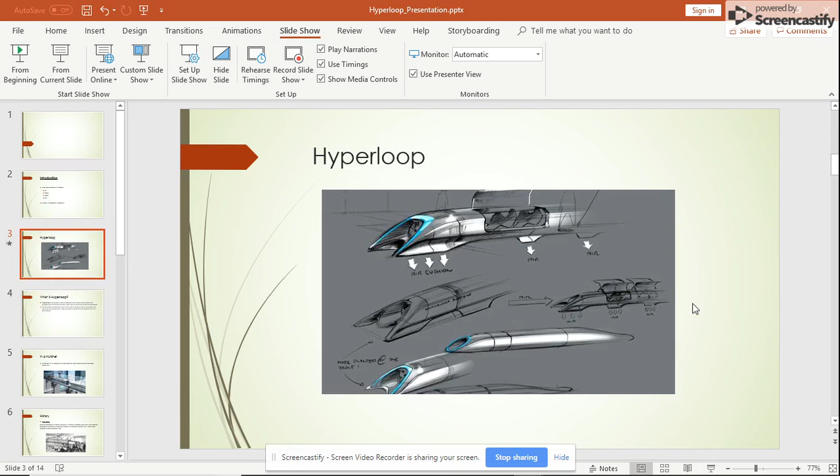This is one of the earliest schematics of the Hyperloop, designed by Elon Musk. So what is a Hyperloop? Let's answer the basic fundamental question. This idea is not a very new one, in the sense that from the 18th century onward, humans have been using pneumatic tubes, or proposed ideas about vacuum tubes. But this is new in the sense that it doesn't just use those ideas, it builds on them. Let's look at how this works.

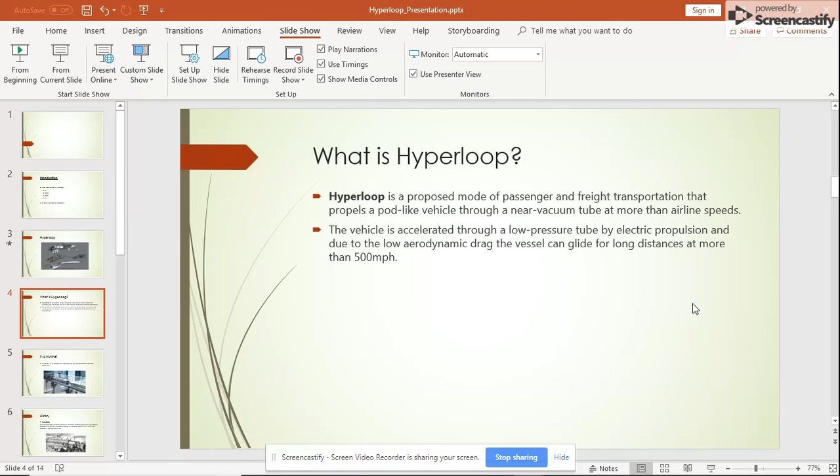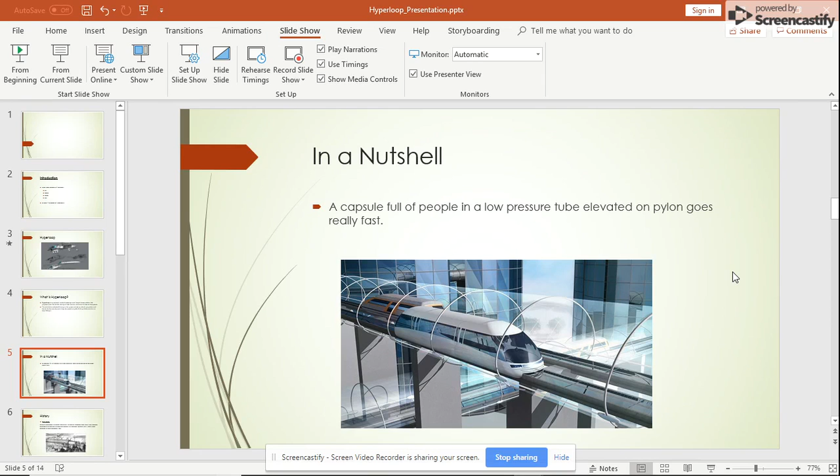This mode of transport is proposed for both passenger and freight transportation. Instead of using a vacuum tube, it's actually near vacuum, low pressure tubes, which propel passenger or freight pods at more than airline speeds, theoretically close to 500 miles per hour. To summarize, a Hyperloop is basically just a capsule full of people in a low pressure tube which goes really fast. To understand this completely, we have to go back in time and look at the history of how these capsules were developed theoretically.

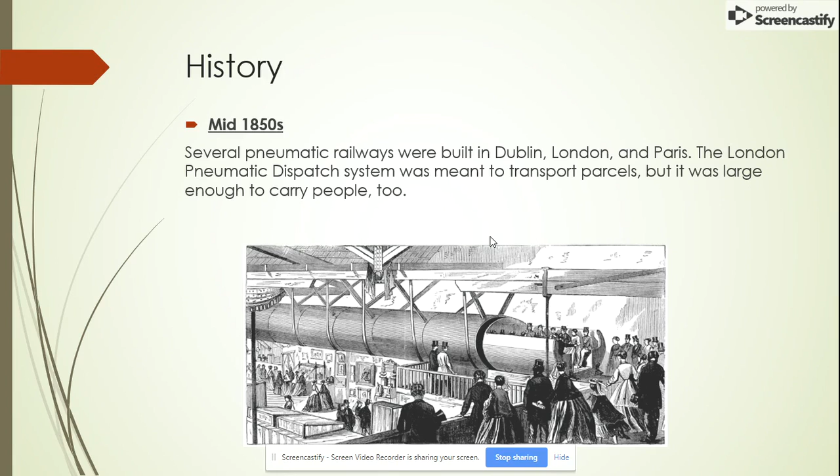Let's go back in history, to the mid 1850s. This was one of the very first times a pneumatic railway system was built, in several countries, in places like Dublin, London, and Paris, and they were meant to transport parcels first. But since the technology back then was not very efficient, the containers were actually large enough to carry people too.

Now let's move on to the 19th century. There were several versions of pneumatic tubes from the mid 1850s to the 19th century. But let's look at one of the major commercial uses they were built for. By the end of the 19th century, once people mastered building pneumatic tubes, they built large scale pneumatic tubes for commercial applications, for transporting mail and other messages.

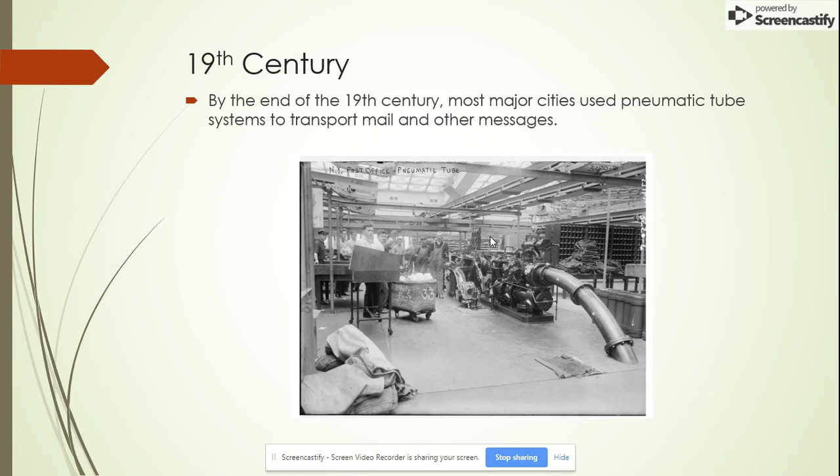I've used the word pneumatic tube a lot by now, so let me explain what it is. A pneumatic tube is a container very close to vacuum, which uses compressed air to move solid packages from place to place. It differs from a regular tube in that a regular tube is usually used to transport liquids, while pneumatic tubes were used to transport solid packages like mail.

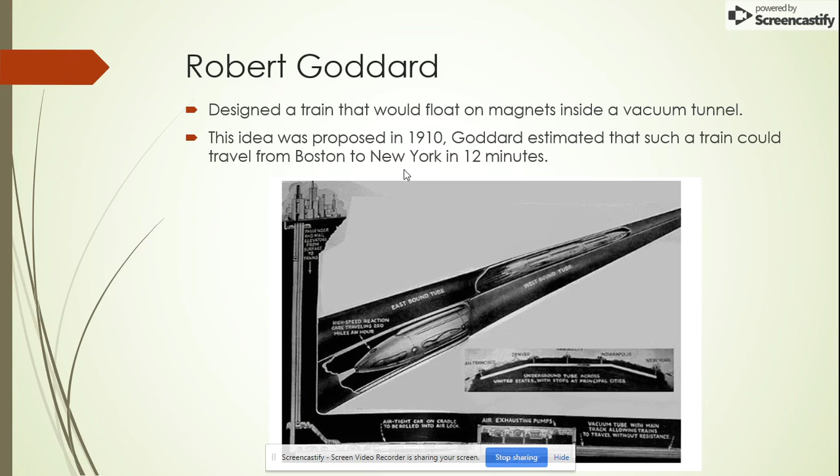In the 20th century, one of the very first models of using a tunnel or tube for large scale transportation was theoretically proposed by NASA pioneer Robert Goddard. His idea was to create vacuum tubes. He wrote a paper on this in 1910, estimating that if we were able to build a vacuum tube from Boston to New York, we would be able to transport people in about 12 minutes, according to his theory.

Moving on to the early 2000s, the next major proposal came from ET3, a commercial company, which designed a small scale pneumatic and maglev train, also built on similar principles to the pneumatic tubes we discussed earlier.

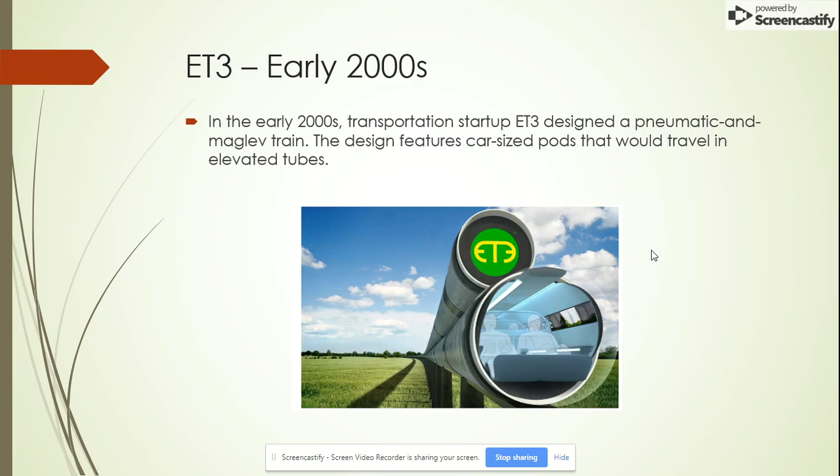So as you can see in the picture, the design features car-sized pods that would travel in elevated tubes. It would not be on the ground; it would be at a much higher, elevated level than the ground.

Okay, now moving on to the present. By that I mean early 2012, 2013, when Elon Musk wrote his first white paper on hyperloops. So essentially, now we understand the history of how humans have been able to evolve this technology, be it using compressed air for transporting mails, and then trying to prove that vacuum tubes would be a better alternative for transporting people from place to place.

So Elon Musk suggested this idea - he was actually inspired by all these ideas, using low pressure tubes to attain very high airline speeds, theoretically close to 500 miles per hour. That is because since we are using low pressure containers, there would be very little aerodynamic drag, which will allow us to attain such high speeds.

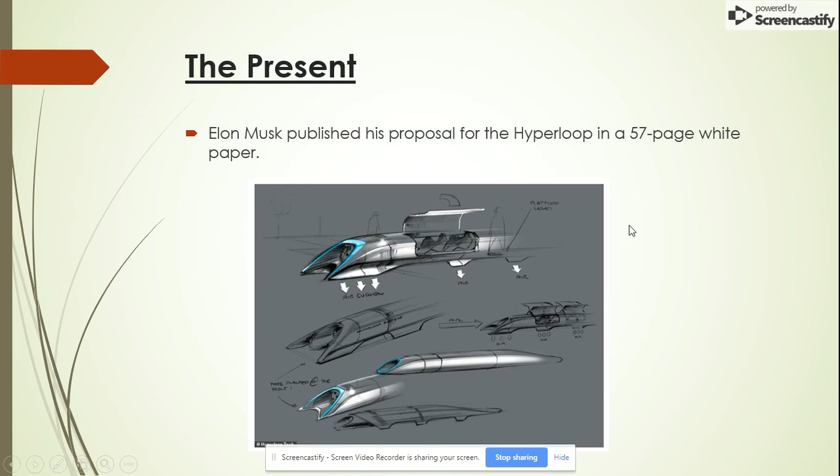Okay, now let's look at the motivation behind developing this project. In about 2012, 2013, the Californian government accepted a proposal for a high-speed rail system between Los Angeles and San Francisco with about a 68.4 billion dollar budget.

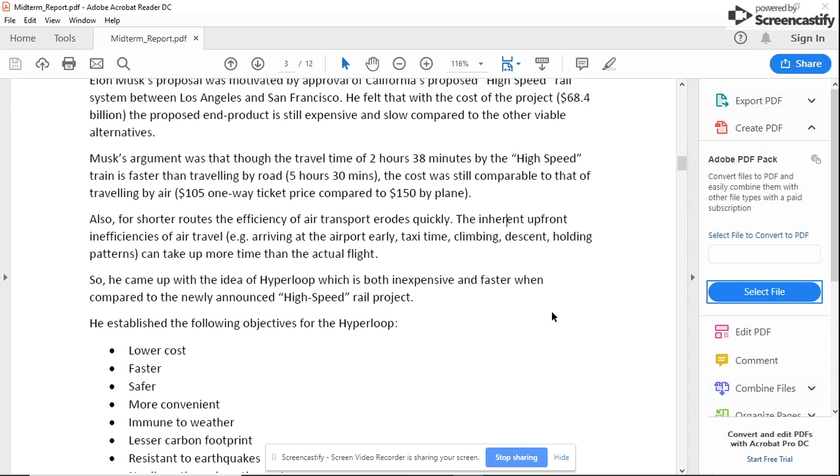After this was accepted, Elon Musk argued that with a travel time of about 2 hours 38 minutes by high-speed rail, although it appears faster than road transport, which is about 5 hours 30 minutes, the cost was still comparable to that of traveling by air - you're paying around $105 as compared to 150 by plane.

So he argued that with about similar or a much lesser cost, we could develop a much higher speed transportation system using low pressure air containers, which reduces the aerodynamic drag, and also which won't be a hindrance to the existing highway system, because you could build this hyperloop on a much elevated level.

So he established the following objectives for hyperloop: lower cost, it has to be faster, it should be safer, more convenient, immune to weather - especially earthquakes - and lesser carbon footprint, and no disruptions along the route.

That is explained by the fact that you won't disrupt - so to build a rail, you're going to disrupt the ecosystem, and you're going to disturb the land in which you'll lay the railroad, you'll develop the railway system.

Whereas for Hyperloop, you're just going to use pylon levels and build these tubes on top of them, and they're at a much higher elevated level, so it doesn't disrupt anything.

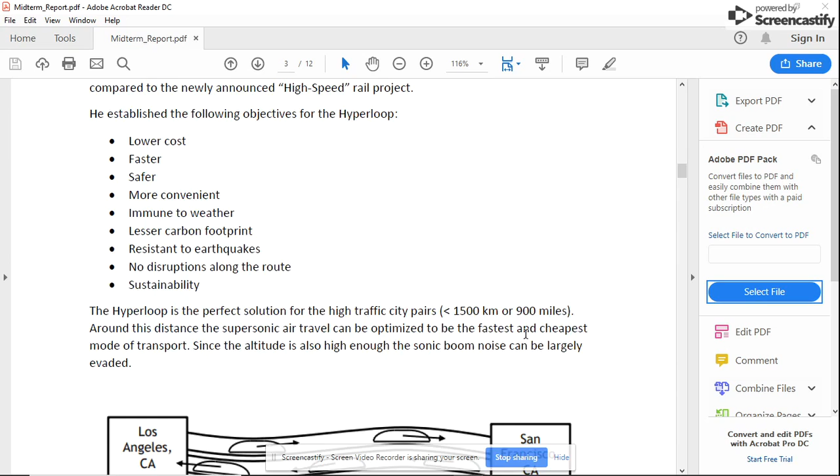And also sustainability - Elon Musk also suggested in his first proposal that since there are solar panels built on top of these tubes, the whole Hyperloop can be self-sustainable. This is one of the schematics between San Francisco and Los Angeles, the first one developed.

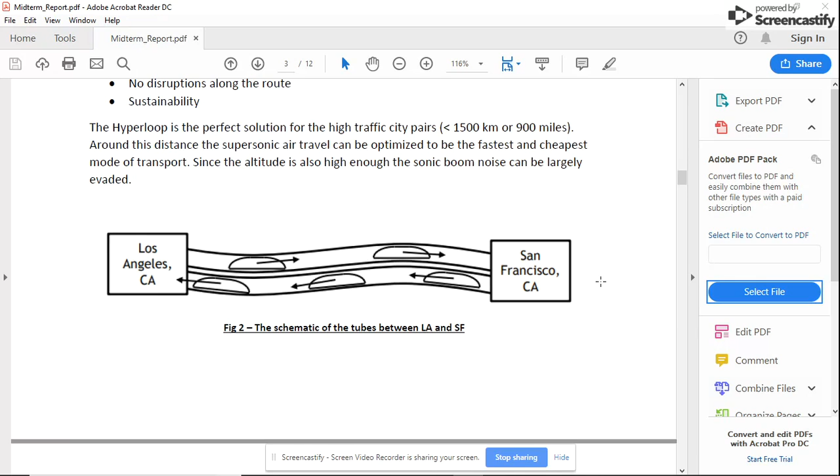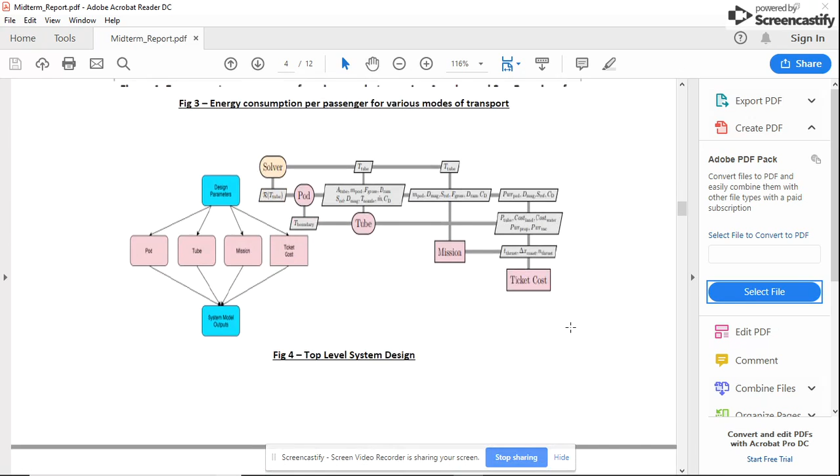And this is the top level schematic of the Hyperloop. If you look at the design parameters, we need the pod, the tube, the mission, and the ticket cost.

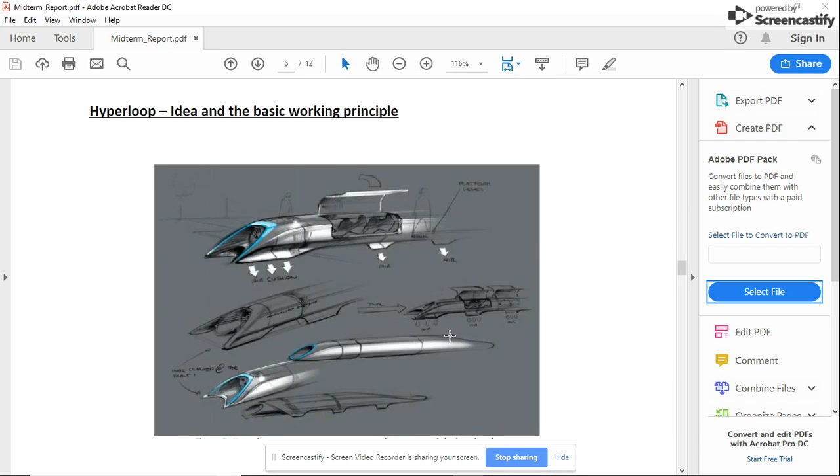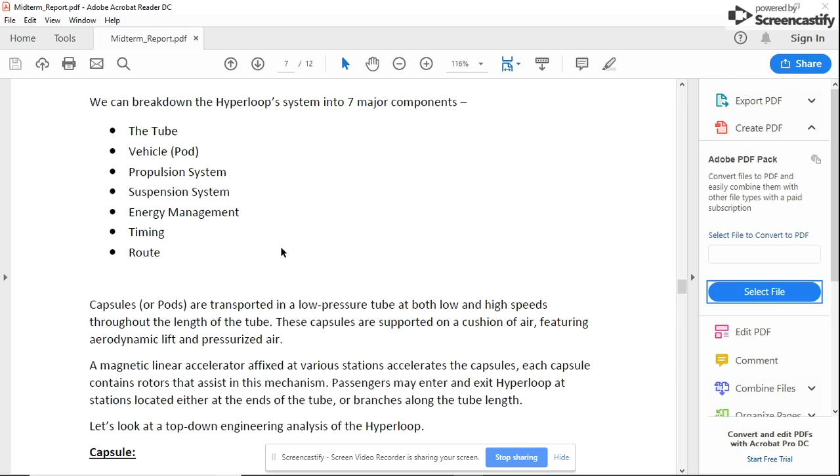Okay, now let's look at the working principle of Hyperloop - the idea and the basic working principle. We can break down the Hyperloop system into 7 major components, as you can see here: the tube, the vehicle or the pod, the propulsion system, the suspension system, energy management, timing, and the route.

Now, to sum it up - I'm going to explain these things in detail later - these pods are transported. The tube is mounted on the pylon levels, and the tube is built on the pylon levels, which also has solar panels on top of it.

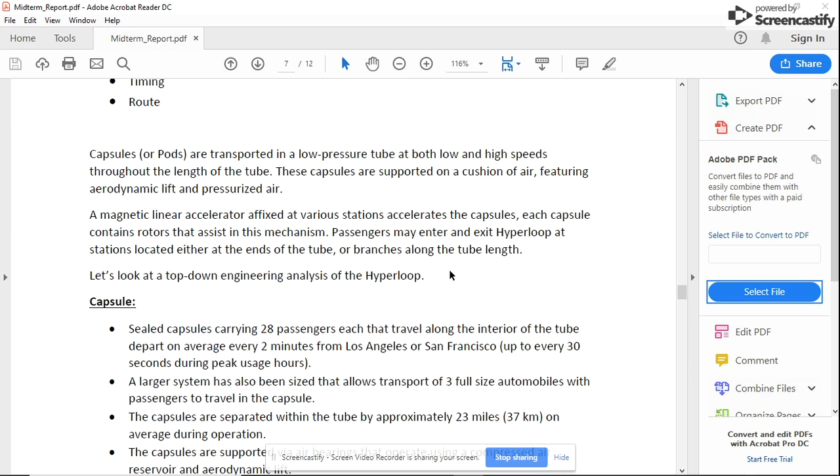So these capsules are transported in this low pressure tube at very high speeds, and also to reduce speed, at a lower speed. These capsules are also supported by a cushion of pressurized air, which also has very less aerodynamic drag. So how does it accelerate?

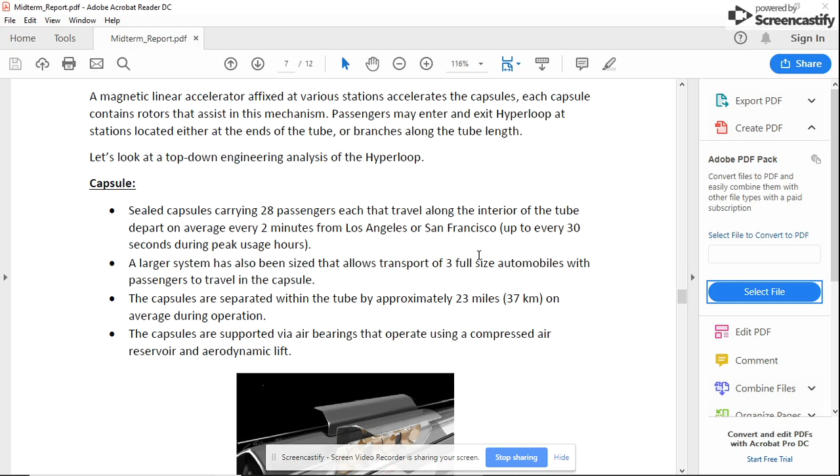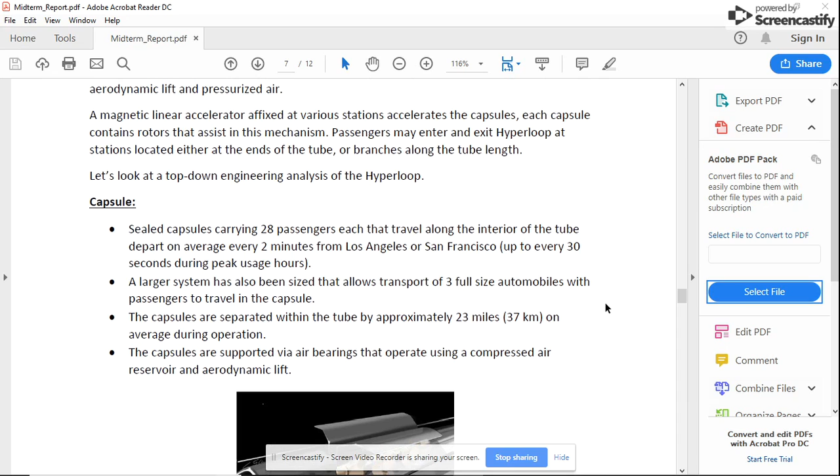A magnetic linear accelerator is fixed at various stations, and these passenger pods have rotors inside them which assist in this mechanism.

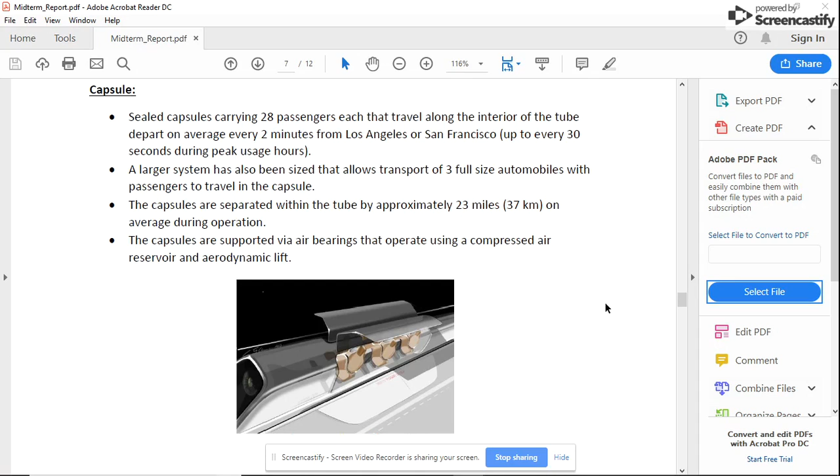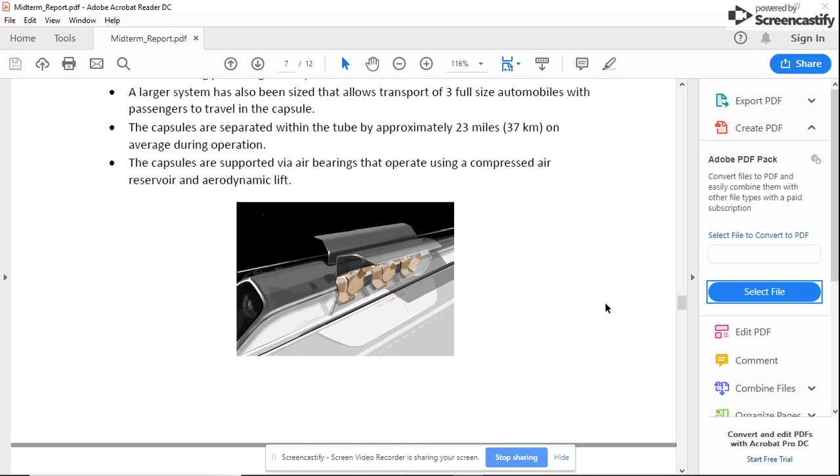Let's look at these individual components, a top-down engineering analysis of Hyperloop. First, the capsule. The first design level idea was it could carry about 28 passengers, and a Hyperloop pod would depart every 2 minutes from Los Angeles to San Francisco. Each capsule or pod would be separated by about 23 miles on average during operation.

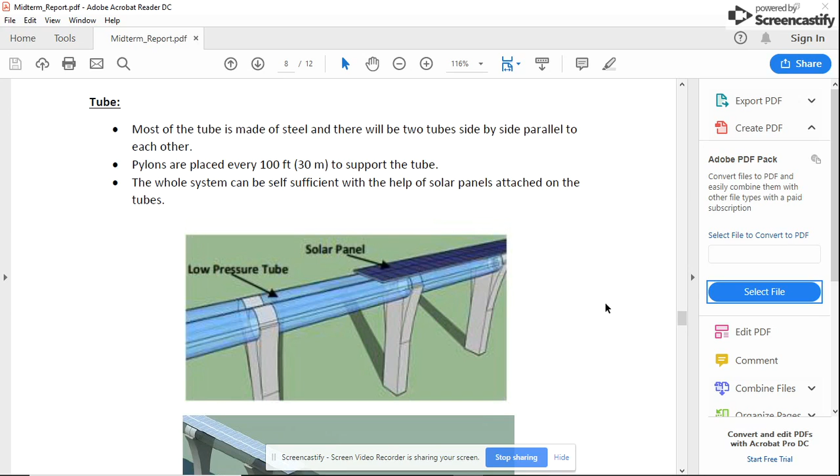The capsules are supported via air bearings. Next, the tube. This tube is made of steel, and in the first track between LA and SF, there are two tubes which run side by side and parallel to each other. Pylons are placed every 100 feet to support the tube. The whole system can be self-sustainable because of the solar panels attached to the tubes, using solar energy.

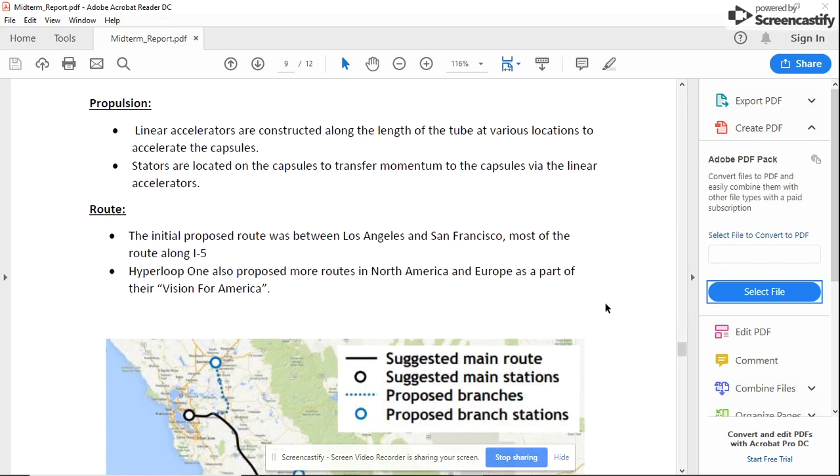Propulsion system - I already explained how the acceleration works, using the rotors inside the pod and the linear accelerators at each station along the length of the tube, which assist in the acceleration of the capsule.

Now we learned about Elon Musk's vision and SpaceX's initial designs on Hyperloop. I would also like to speak about two more companies, Hyperloop Transportation Technologies and Hyperloop One, which also picked up this idea after the first white paper and started developing initial versions of the Hyperloop.

Last year, Hyperloop One was able to successfully test the first version of Hyperloop on about a 500 meter track, attaining speeds of about 250 miles per hour. It's not yet as quick as proposed in the paper, but it's a really good start, and it is sustainable till 500 meters. It can be built further.

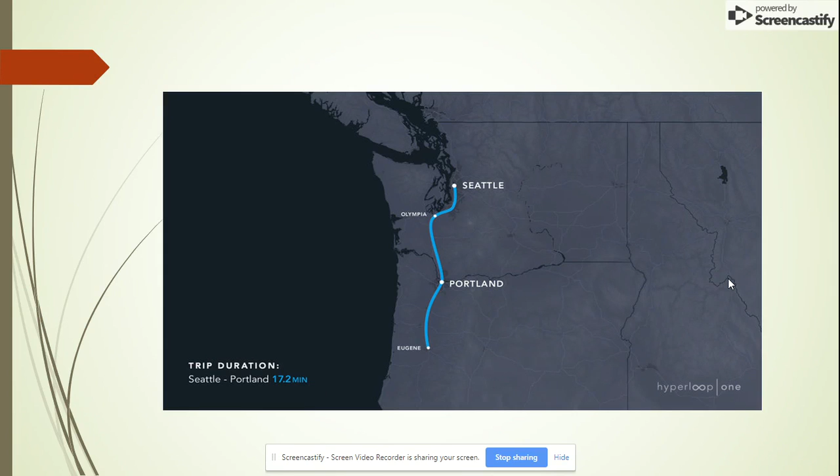SpaceX is actively launching the Hyperloop contest every year, in which a lot of students from prestigious universities take part. It's really exciting times ahead if you're able to build at least a commercially viable application for humans. Thank you.